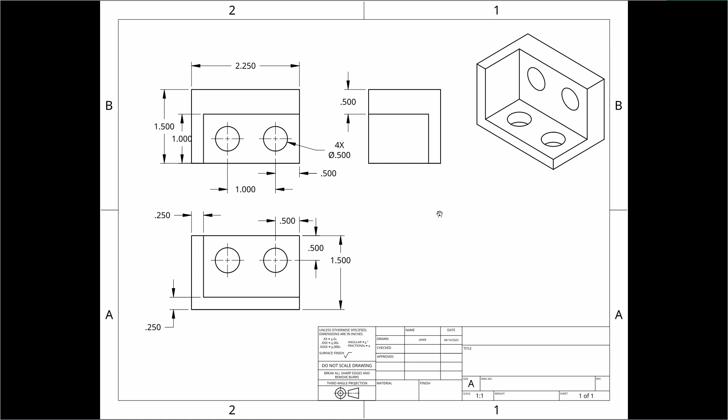Make a screenshot of this if you want, and we can start. I will explain how to make this from start to finish. So let's get started. This is OnShape, and this is a free subscription.

We will go to create, document, and we will call this number 10.

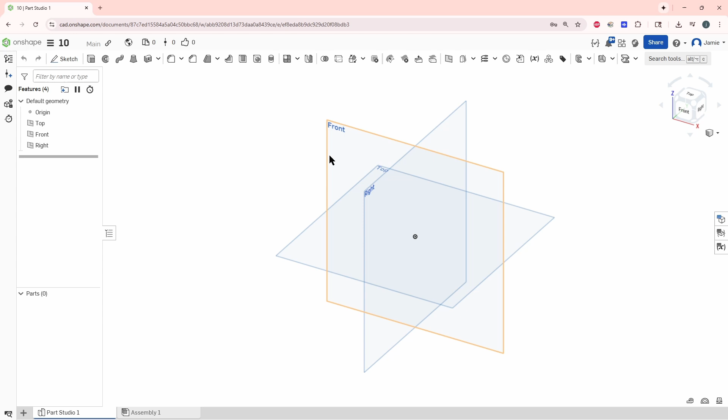We're going to start on the top view right here, so we can hide the front. We can click on the front and click on right, and then we can hit Y to hide those. And we want to normalize this. Let's go to top view.

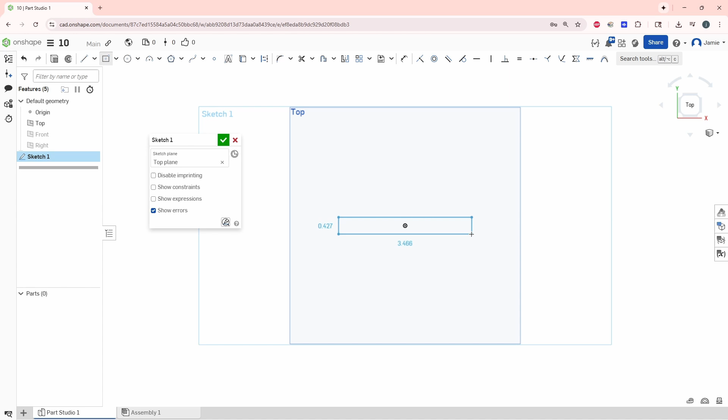All right, so now we want to build our overall size. Let's go with the sketch, and we're going to sketch on the top. Now let's go with a center point rectangle. Start right here. So this is 2.25. We just make it roughly the size.

Now we hit D for dimension, or we click right here. So now we want to go from this left to the right side, and it's 2.25. Okay, and then we want to go 1.5 from here to here. We're working in inch today.

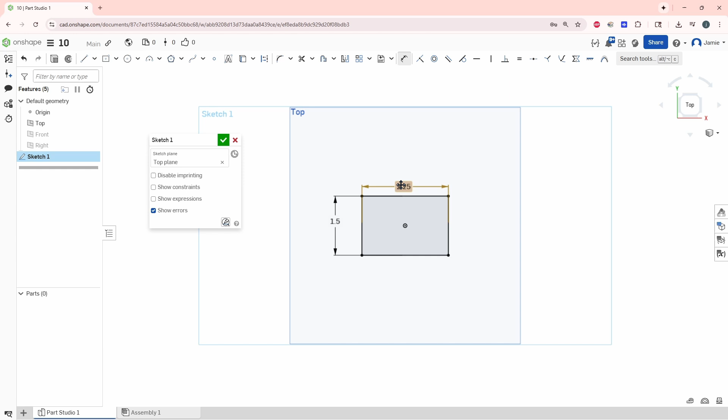1.5. Okay, and now we need to create another square inside of here, but we're going to change that to corner rectangle. And we can click there and here. Okay, and now we can dimension this.

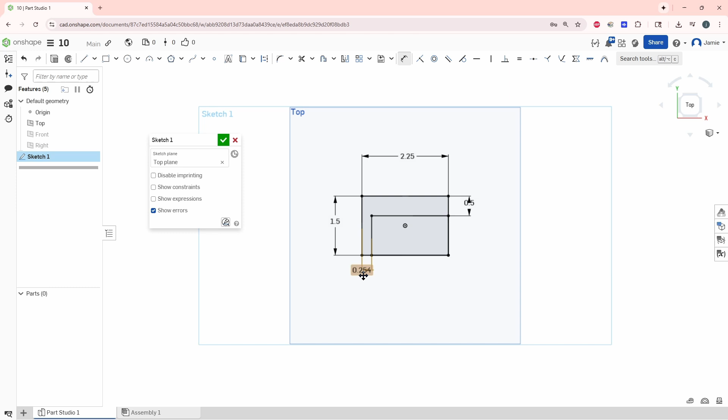This here to here is 0.5. And then here to here is 0.25. Double click on that, fix that. All right, so now we got the general shape done. Now we can click OK.

And now we can rotate using our right mouse button, holding down that right mouse button. And then we can rotate that and then zoom in with your scroll wheel. And now we can extrude this shape right here.

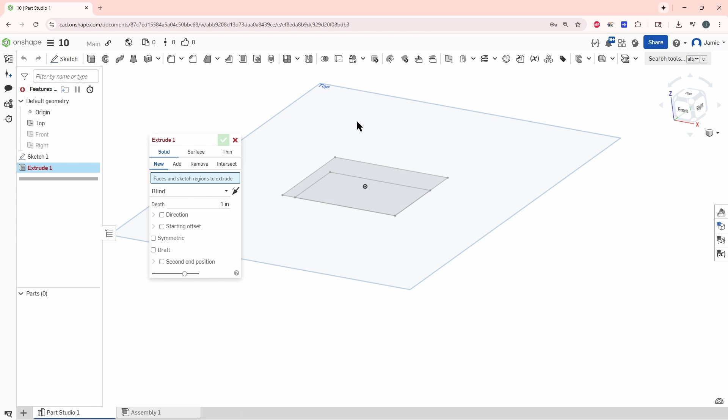We're going to extrude just this shape first, and then this shape second. So let's go with extrusion. Extrude that guy right there. Our total height is 1.5.

And we can flip it by pushing that button right there. Okay, let's say OK, first extrusion. And you can see our sketch disappeared. So we can go over here and click on this eyeball to show our sketch again.

Let's go back to extrude. We're going to extrude this right here. And we're going to do a starting offset. So we're flipping it, we're going to go this way, that way.

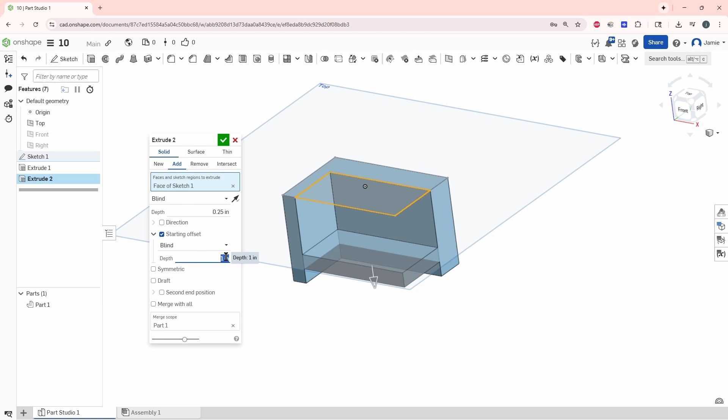And then the thickness of this is 0.25. So let's change that to 0.25. And we can see that we need to move this down. Should be 1.25. There we are. Okay, click OK.

And that added it automatically. Let me double check that and show you what it's doing. So it is merging with part 1. So we did a solid, we did add, we did a starting offset, and these are our offset things. And then it merged with part 1. Okay, so we still only have one part total.

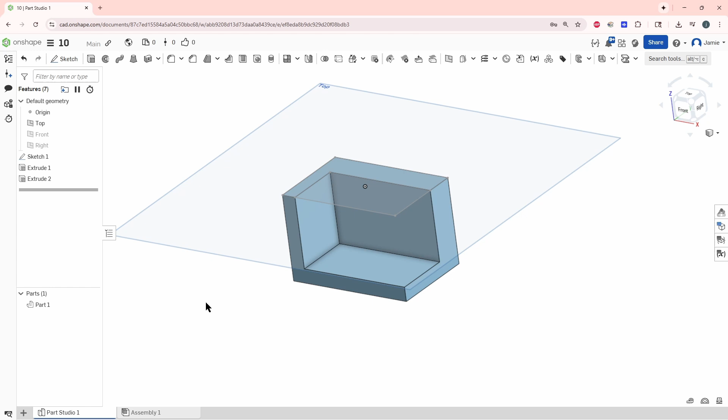All right, so now we got to put a couple circles in here. So let's rotate this a little bit. We can click on top view if we want to normalize that to our view. And then we go over here to sketch. We're going to sketch on this right here.

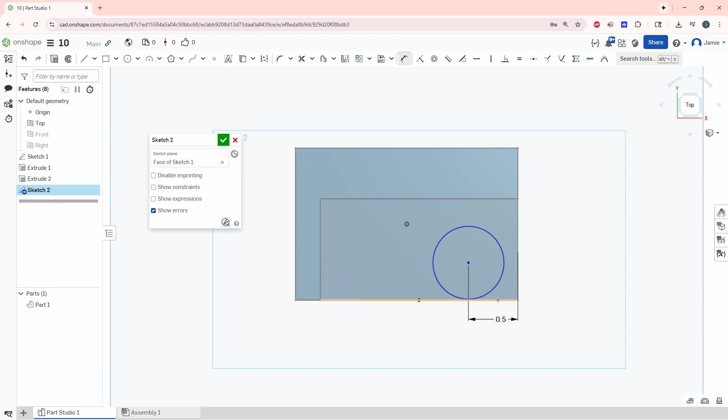And we can click on the first circle. So this is a 0.5, so we'll make it roughly that. And then we can hit D for dimension, and then dimension it from here to here, 0.5. And then from here to here, another 0.5. Okay, and now we need another circle all the way over here.

So we're going to try to hover over there. We're going to build another circle. And we can hover it, and then you see the dotted lines. That means it's following that same center point. Okay, now we can hit D for dimension, and we can get our 0.5 on this guy, and we can do our distance here, and this is 1 inch.

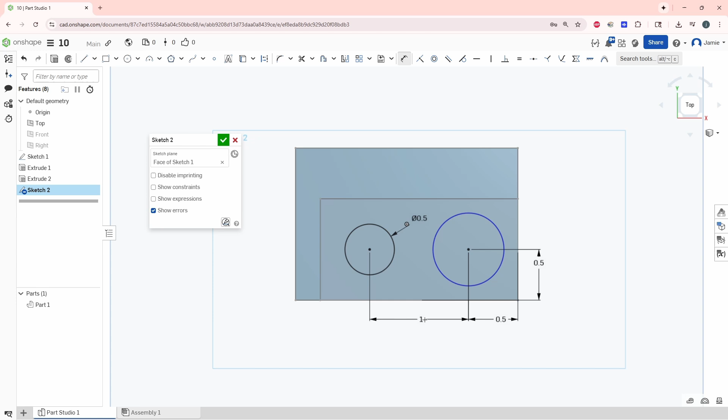Oop, we didn't do that, so that needs to be 0.5. There we are, so okay, fix that. All right, so now we can finish the sketch, and now we rotate.

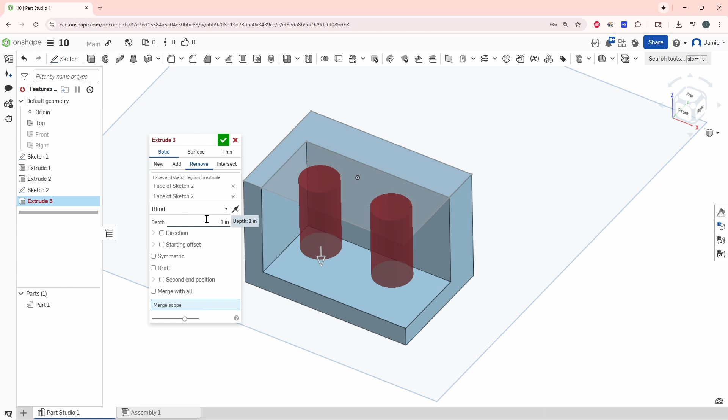Right mouse button to rotate that. And we can go over here to extrude, click on that guy right there, click on that circle, click on that circle. We're going to click on remove, and we're going to flip it. It actually already flipped automatically. So I'm just going to say, I want to remove this, and I'm going to go through all, so it's going through everything. Click OK. And it didn't work.

So I'm just going to double click on this guy, and I will merge scope, and I'll click on what to merge, and that's part 1. So now it disappeared. Perfect.

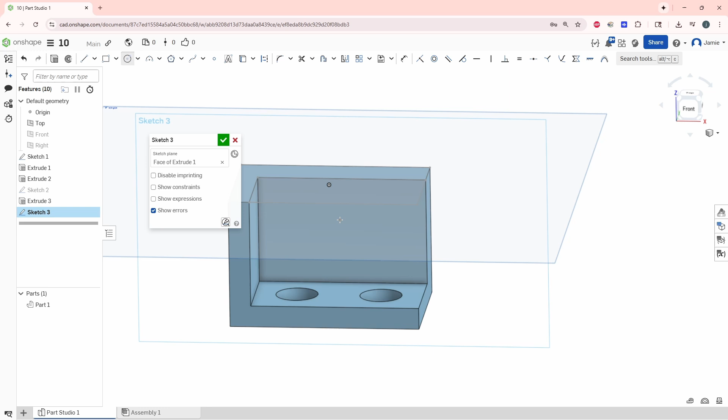All right, so now we got to do that on the back wall here. So I'm going to click on this and use that. I'm going to sketch on this back wall, and we're going to do the same thing. So I can go with first circle and put the first circle down. Then I can do D for dimension, grab the edge to here. That's 0.5. And then we can do this to here, and that's another 0.5.

And if we want to, let's escape out of that, uncheck that guy so it's not showing. We can click on this guy. We should be able to hit Control C, Control V, and copy paste that. Okay, let's shove it down, and we're going to hit 0 as that distance, and then way over here we're going to do 1, or we just type in -1.

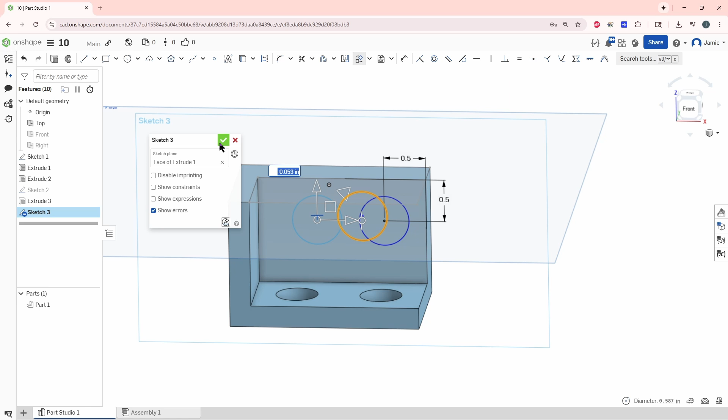Okay, and it went a little bit farther than I thought. That's okay. I'm just going to place it there. Say okay, we got our 2 circles. It jumped out of the sketch. Let's get back in that sketch.

And now we're going to move this. We're going to check the distance between there and there, establish a dimension from there. So here to here, 1. And then I want to verify that this to here is 0.5. It's good, okay, all right.

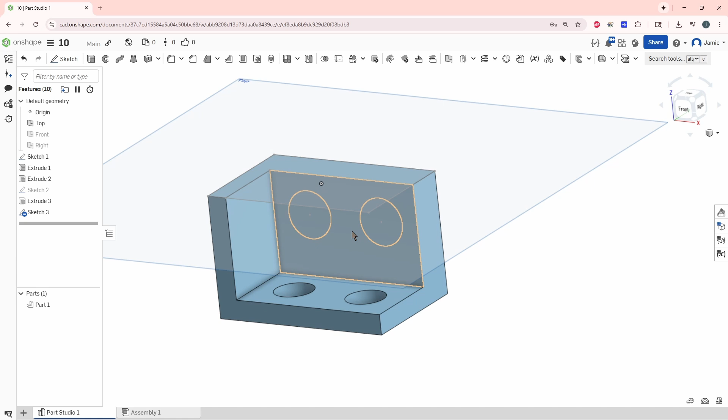So now they're kind of hidden out there, okay, but now we can go to extrude. Let's click on this guy, let's click on this guy. We're going to flip it, and we're going to remove. It automatically removed and automatically merged with part 1. Okay, okay, and that is our piece.

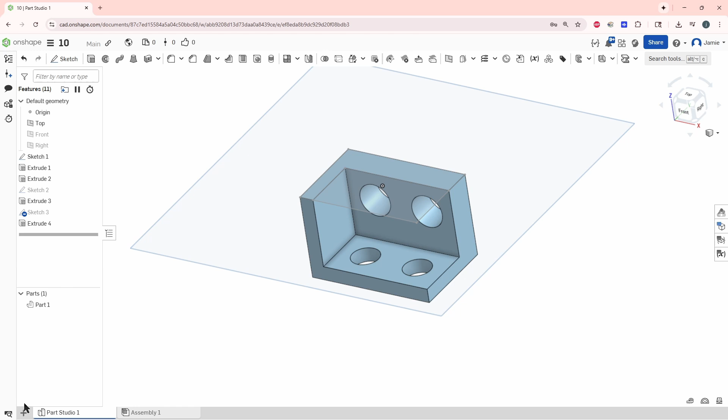So now if we want to do some drawings and create a drawing on this, we'll go over here to plus, we'll go create drawing. It's an inch, yes. And now we will throw down our part. Click on the part, and I will throw this right here. Let's see, and then I'll create one here, 3 views, and it's going to be third angle projection.

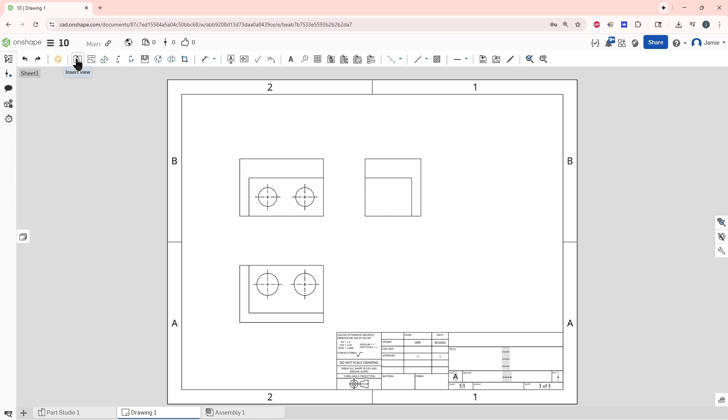So let's click there, pull over here, and now I like to create an isometric view right here. All right, we're going to click on insert view, and we're going to go over here, click on isometric, and let's insert an isometric view there.

All right, let's go over here to dimension. We're going to start dimensioning this. So here to here is 2.25. Here to here is 1.5. Here to here is 0.5. Here to here, oh, cancel. It's actually D. Here to here is 1 inch.

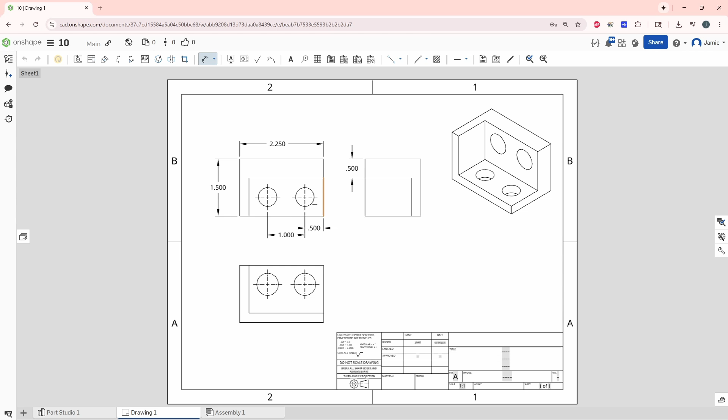Okay, and just looking at the drawing. So here to here is 0.5. We got a diameter of 0.5 and 4x.

Just click off and it will get you out of that dialog box. Now we're going to go back to D, get this dimension. So this is 0.25, this is 0.25, and this is to the circle. We got 0.5. Here to here, 0.5. And then total height is 1.5.

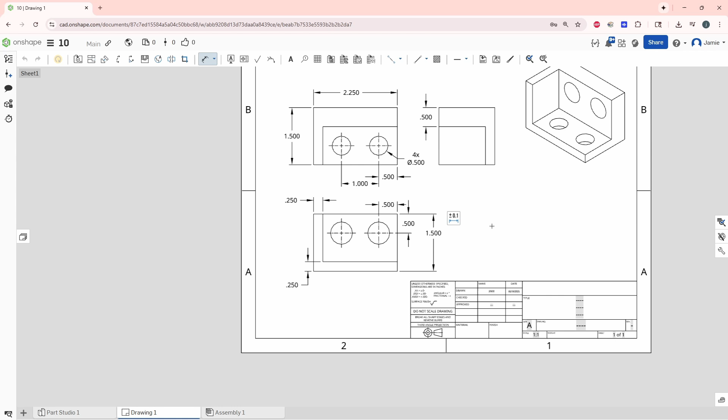Escape to get out of that. Let's kind of readjust these. And we can actually, yep, there we go, clean this guy up, make him look a little better. All right, and that is our drawing.